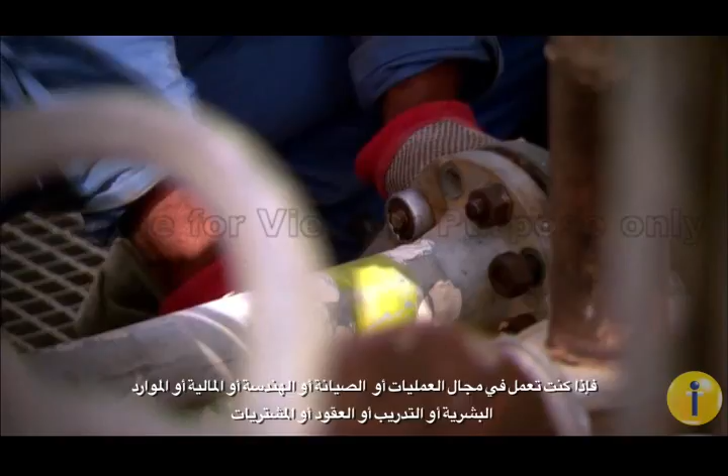Asset integrity and process safety management is a crucial matter for our survival and future success, and yet so many understand so little about it. All the different disciplines have an impact on process safety management, and it can make the difference between a safe operation or a catastrophe. If you work in operations, maintenance, engineering, finance, HR, training, or contracting and procurement, you're bound to have a role to play, but might just not realize your importance. This film aims to increase your awareness on what process safety is all about.

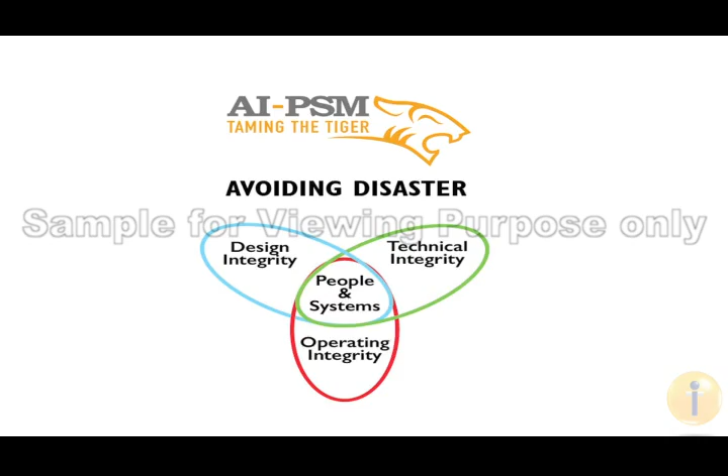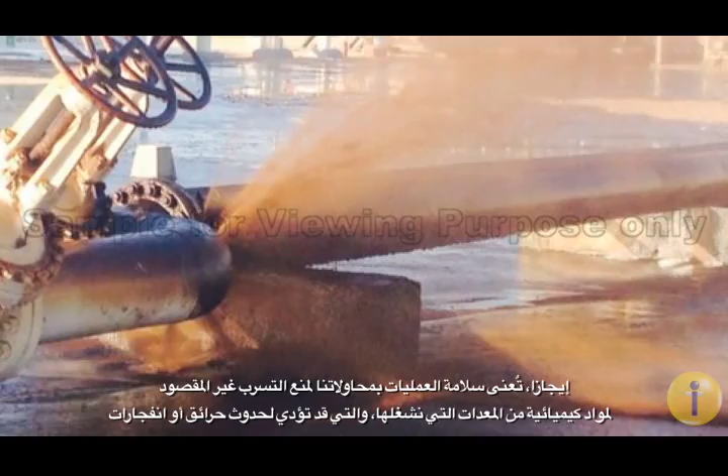So in a nutshell, process safety is about managing the major accident hazards and how we all try to prevent unintentional releases of hazardous substances, which could lead to fires, explosions, and other undesirable consequences to people and the environment. It is a blend of engineering and management skills focused on preventing catastrophic accidents. So what's all the fuss about? I hear you say these disasters are so rare, and are they really worth bothering about?

They are less rare than you think. There have been numerous process safety disasters all over the world, resulting in severe consequences, lost lives, injuries, billions upon billions of dollars lost, and serious reputational damage for those held responsible. All the incidents were avoidable and only served to reinforce the importance of process safety management for each individual, the organization, and community.

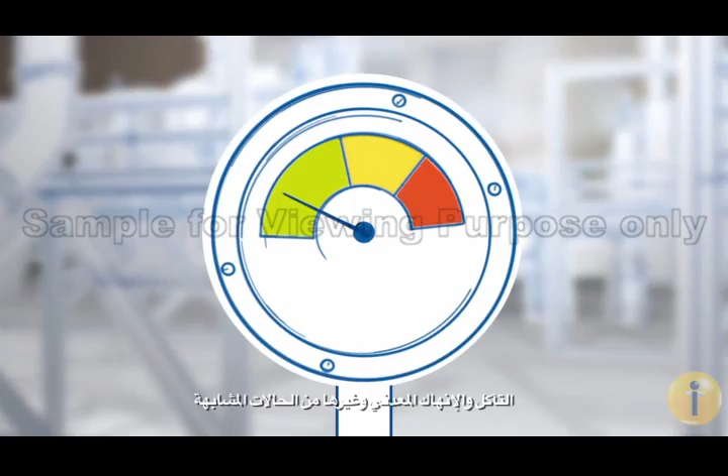In PDO, we daily deal with hazardous chemicals, which are highly flammable, toxic, corrosive, high pressures and temperatures. These materials are inherently hazardous and have potential to harm if not controlled properly. Process safety management is all about keeping the hazards under control inside the equipment, pipes and vessels which are designed to handle them safely. It is all about the prevention of leaks and spills, equipment malfunction, overpressures and excessive temperatures, corrosion, metal fatigue, and other similar conditions.

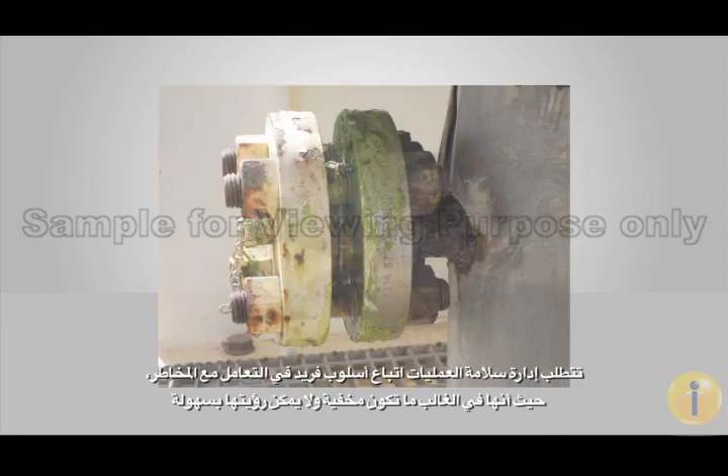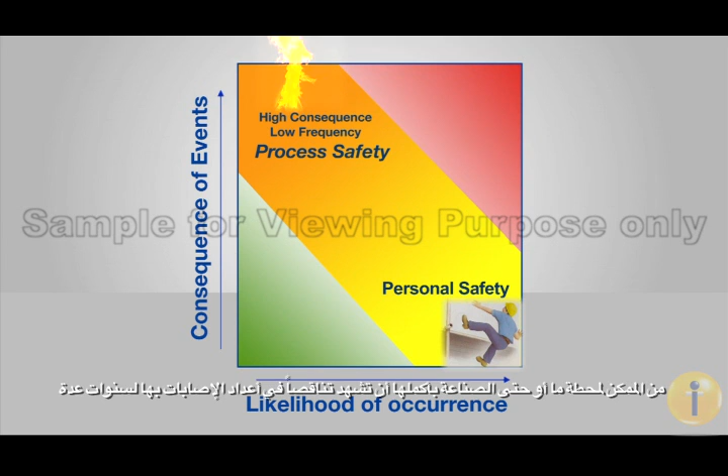Managing process safety requires a different approach as hazards are often hidden and cannot easily be seen. Process safety incidents are high-consequence, low-frequency events and can have catastrophic effects. It is possible for a plant, and even the entire industry, to have declining numbers of injuries for many years, and then have a very serious process safety incident with little or no change in its operation. Process safety management is paramount to protect employees, assets, the community, and the environment.

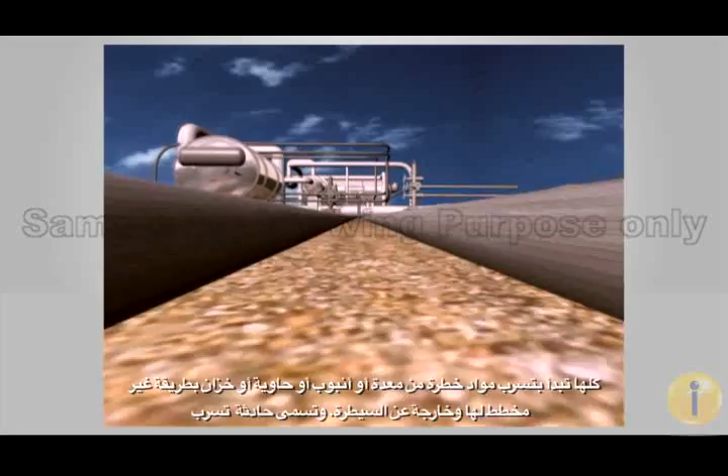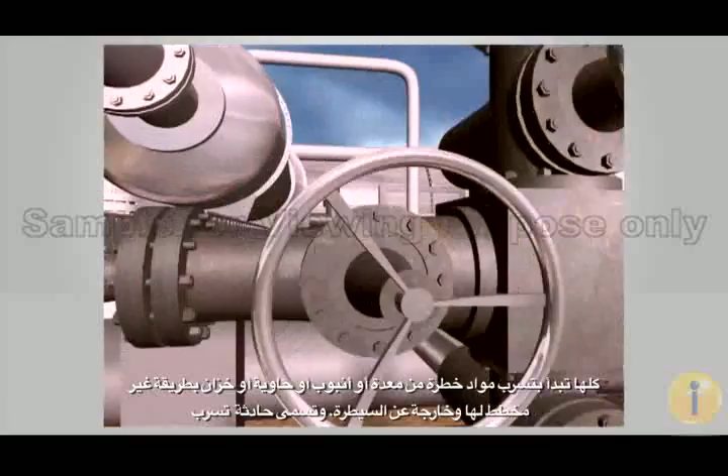So I hear you ask, how are process safety incidents caused? They all generally start with an unplanned or uncontrolled release of hazardous material from equipment, vessels, pipes or tanks, which is called a loss of primary containment event. Remember, if there is no loss of containment, then there is no process safety incident. Process safety incidents are rarely caused by a single catastrophic failure, but rather by multiple events or failures that coincide.

As the consequences are so severe, we put multiple barriers between the hazard, such as hydrocarbon, and an undesirable consequence such as an explosion. These barriers are sometimes in the form of hardware barriers such as shutdown systems, relief systems, and gas detectors, or they can be softer barriers which require human interventions such as responding to an alarm, following a procedure, emergency response, etc. Unfortunately, all our barriers have weaknesses.

We can think of these weaknesses as holes in the barrier. When the holes align, the hazard is released, resulting in a potential disaster. If you consider barriers as slices of cheese, the holes in them are the weakness. The more the holes in the barrier, the easier it is for the hazard to pass through, resulting in an incident. Sometimes, by our own acts or omissions, we weaken or defeat these barriers. This is a big cause for concern.

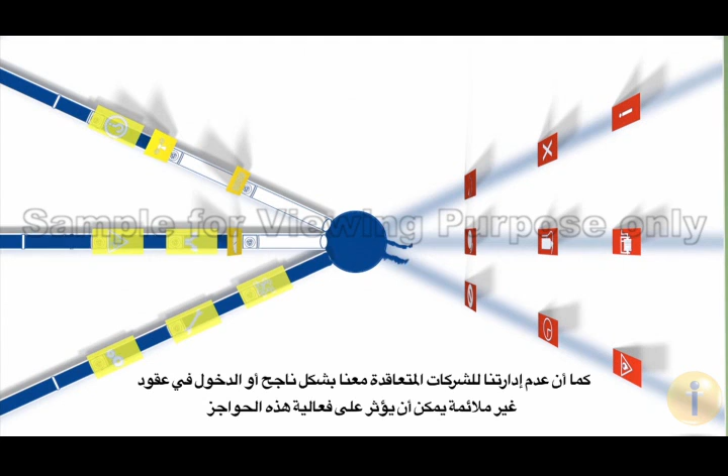If critical procedures are not followed, scheduled maintenance activities are not performed, or alarm rates are too high, the barrier is compromised. Similarly, if the right assurance processes are not followed during the project stages, we start with an ineffective or weak barrier. Not managing our contractors correctly or setting up inadequate contracts can also impact on our barriers. In some instances, the barriers are completely removed. An example might be if a person puts a shutdown system in bypass mode without putting a mitigation plan in place.

But surely, PDO is not at risk. Well, think again. Let us take a look at ourselves. At PDO, our assets are aging, and our risk profile is continuously increasing. From the early days of low-pressure oil, our operations have become ever more complex. Our hazards have increased significantly as we are now involved in gas production facilities, sour fields, and have adopted new cutting-edge technologies like enhanced oil recovery, which involve much higher pressures.

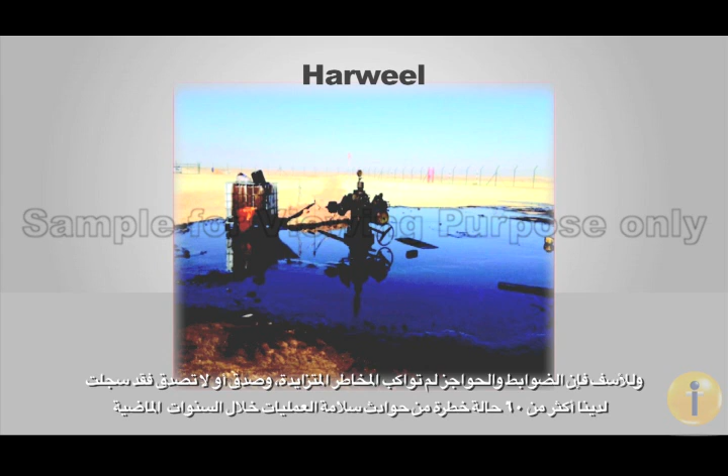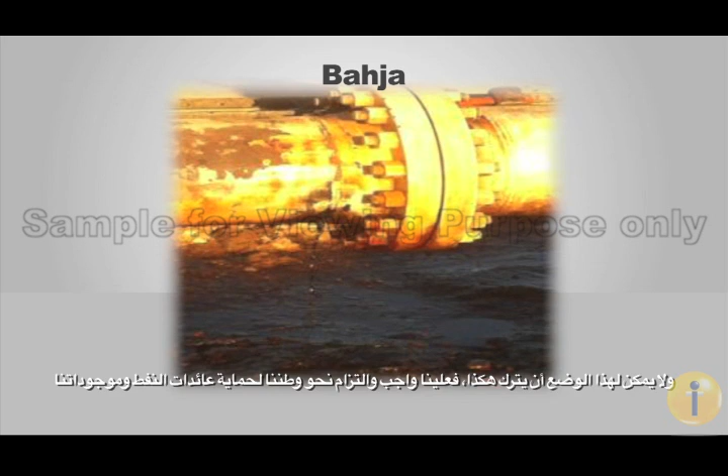Unfortunately, our controls and barriers have not kept up to the rising risks, and believe it or not, we had more than 60 serious process safety incidents during the last years. This cannot be allowed to continue, as we have a duty to the nation to protect the oil and gas revenues and our assets. How can we help solve this problem? Given the nature of the risks involved, ensuring the safety and integrity of our assets is paramount to us. Now let us think on what makes a plant safe. Where are there no process safety incidents?

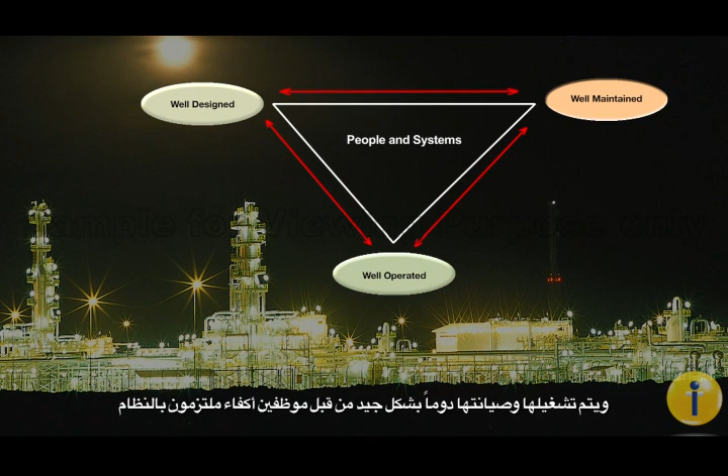A safe plant is well designed, well operated, and well maintained at all times by competent people following and complying with the systems in place. Good process safety performance can be ensured only if the design, technical and operating integrity are maintained throughout the life cycle of our assets. It definitely is not a part-time job.

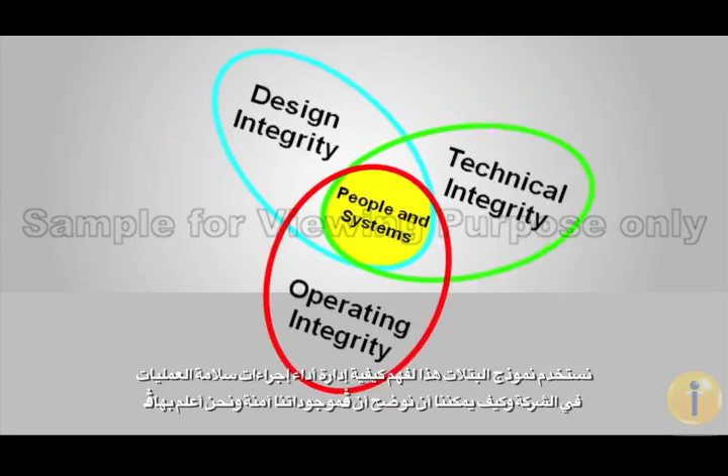We use this PETAL model to understand how the process safety performance needs to be managed at PDO and how we can really demonstrate that our assets are safe and we know it. Let's look at the life of the plant, and as we do, think how we might be involved in the protection of our assets at some stage. Process safety starts at the design.

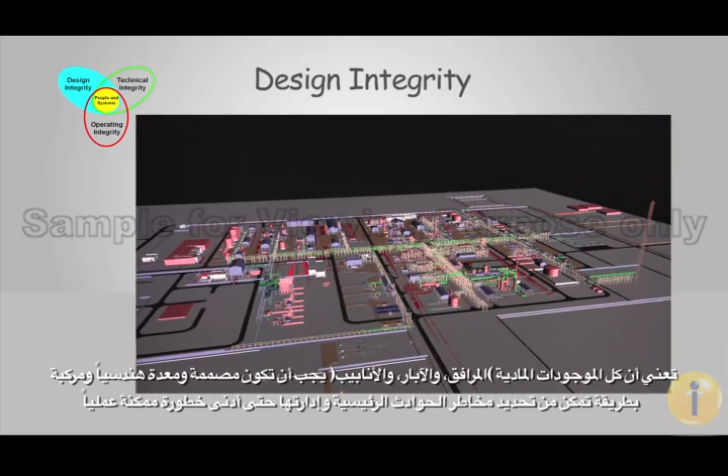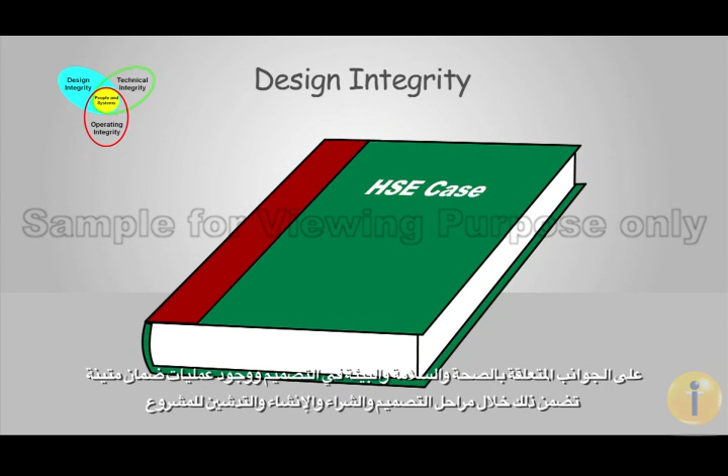Design integrity means that all physical assets, facilities, wells and pipelines must be designed, engineered and constructed in such a way that all major accident hazards have been identified and managed down to as low as reasonably practicable, or ALARP. In reality, this means complying with the design standards, maintaining the design HSE case, and having robust assurance processes during the design, procurement, construction and commissioning phases of the project.

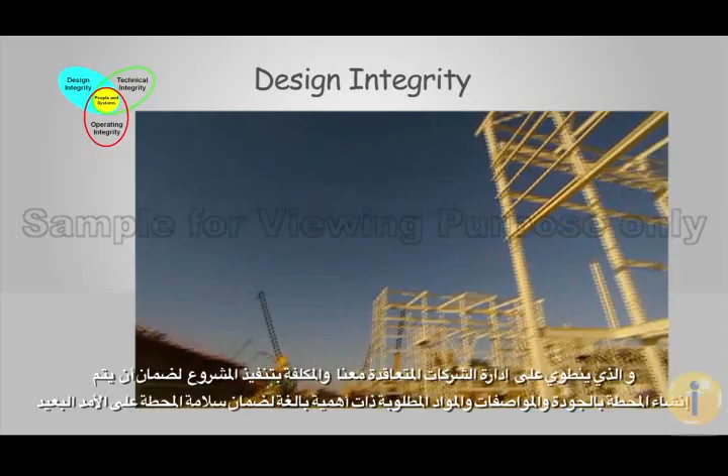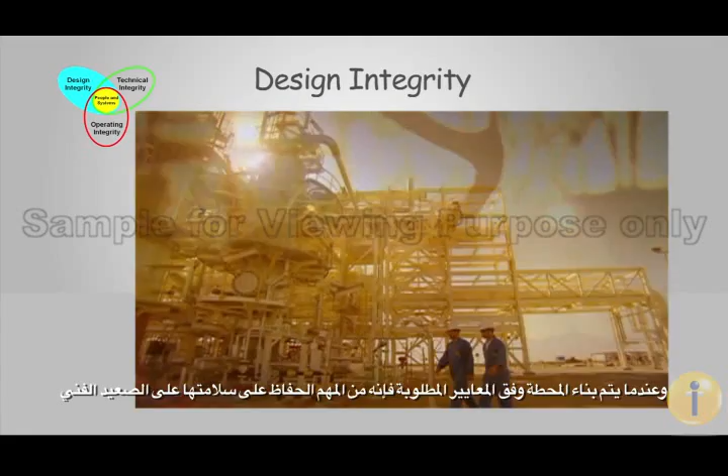The next stage is for the plant to be built, which involves properly managing contractors who do this and ensuring that the plant is built to the right quality, specification, and materials for its long-term safety. Once the plant has been built to the required standards, then it is crucial we maintain its technical integrity. This gives us assurance that our hardware barriers designed to prevent a major incident continue to work as intended.

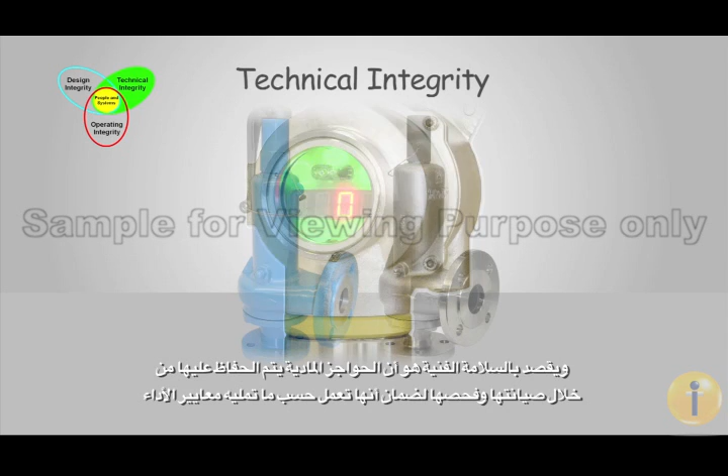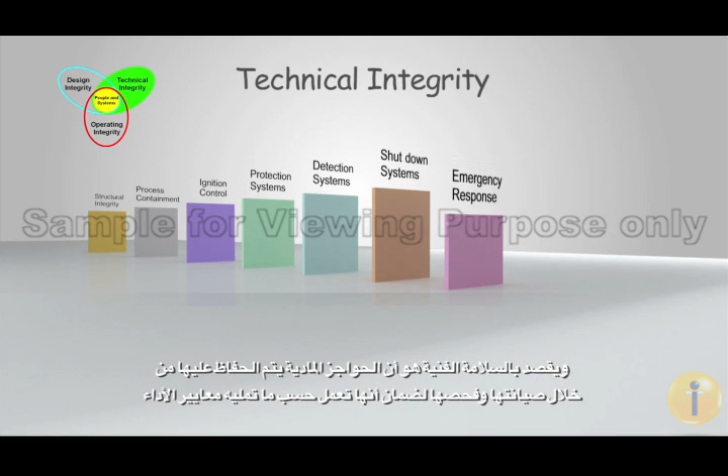Technical integrity means that our hardware barriers are maintained and tested to ensure that they will continue to perform as the performance standards dictate and are there to protect us when needed. It also means that we execute our planned and corrective maintenance tasks and make our deviations visible.

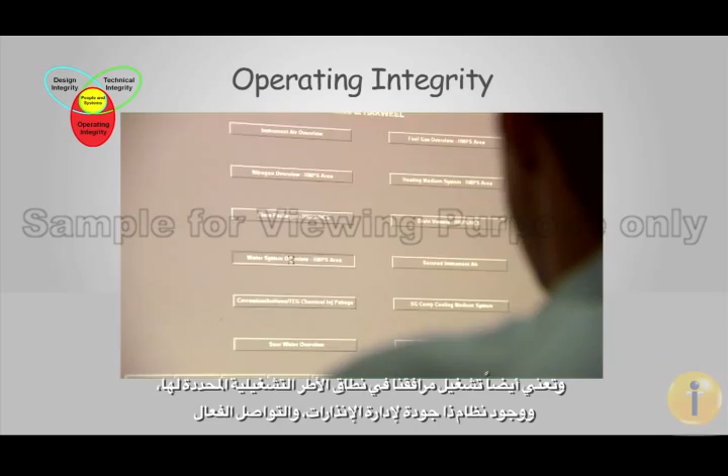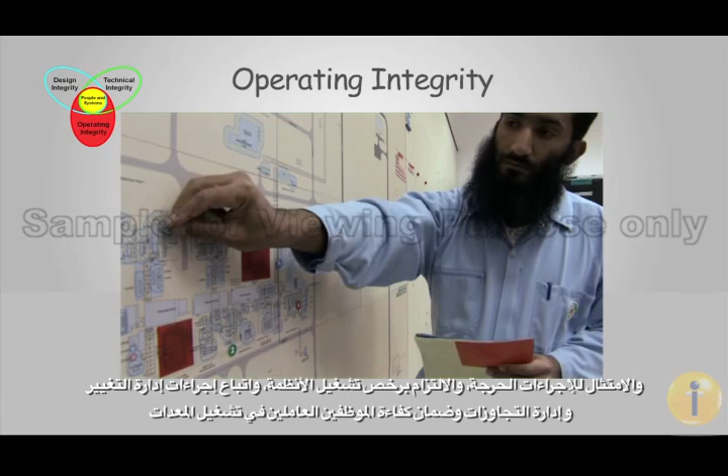Operating integrity covers all the different aspects of maintaining safe operations. It means, amongst other things, operating our facilities within their operating envelope, alarm management, effective communications, complying with critical procedures, adhering to permit to work systems, following management of change process, properly managing our overrides, and ensuring competence of personnel.

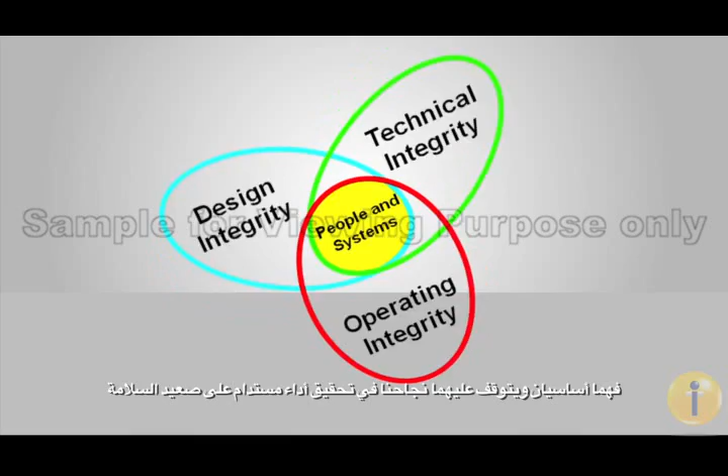Common to all of the above, and arguably the most important of all, is our people and systems. These are fundamental and underpin our success in delivering sustained process safety performance. It does not matter which discipline you come from. We all have a role to play, either directly or indirectly, in maintaining the design integrity, operating integrity, and technical integrity of our assets.

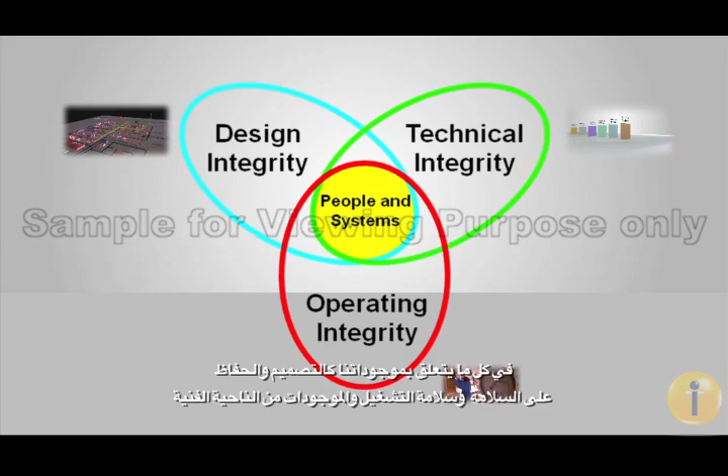Frontline staff, operators, technicians, contractors and engineers have a more visible and active role in process safety through their day-to-day work and must understand the specific hazards of the materials, be familiar with and follow critical procedures, understand the process and equipment, know how it is supposed to work, and be alert to things that are different: noises, smells, drips, leaks, vibrations.

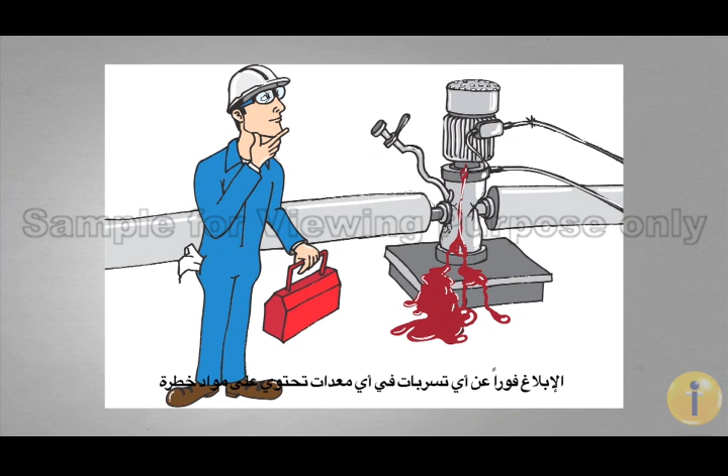Report any leaks immediately on equipment containing hazardous material. Follow a strong technical integrity program that includes equipment inspection, material verification, corrosion under insulation, vibration analysis, and manage deviations. Know how to maintain equipment intended to protect us. Fill out inspection sheets accurately.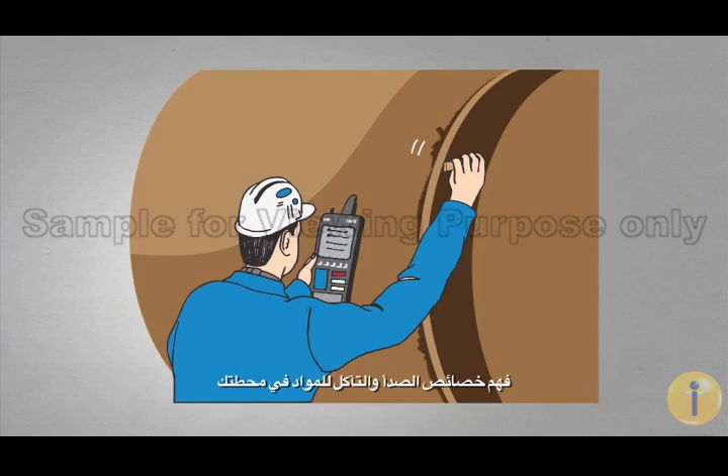Follow the management of change process. Understand the corrosion and erosion properties of the materials in your plant. Know about the emergency shutdown systems in your plant and test them as per the prescribed frequency, and much more.

In addition, support staff have a critical role in ensuring that adequate resources are assigned with the right competencies, and clear definitions of expectations, responsibilities, authority and accountability at all levels of the organization have been assigned. Effective process safety audit systems are in place to ensure adequate process safety performance. Deficiencies found during assessments, audits, inspections and incident investigations are addressed promptly and tracked to completion.

Priority is given to funding projects which are related to process safety. Contract holders maintain the HSE requirements of their contract staff. All the spares and contracts are managed so that hardware barriers continue to work as intended. The competencies of staff and contractors are managed. Finally, remember, if managers do not want to hear, people stop talking.

Effective process safety governance and culture are not a choice, but a must for the survival of our company. Remember, we all have a role to play, and that undoubtedly means you. Today, let us take time to think and reflect on how each one of us contributes in managing asset integrity and process safety, and help in preventing process safety incidents. Let us all ask ourselves, what can we do better today than we did yesterday?